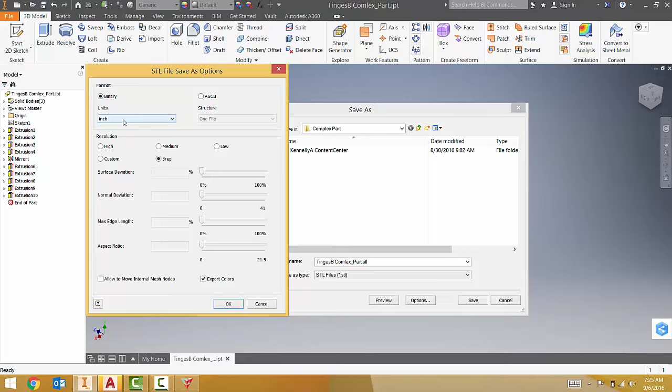First thing I have to do once I'm done modeling my part is go to the File menu and go to Export. I'm going to change the format of this file from an .ipt file to an STL file, which is actually the exact same file type used for 3D printing as well. Before you click Save, it's very important you go to Options and make sure the units here are the same as the units you used, in this case inches. Then click OK, select the location you want to save this file to, and click Save.

Once you have that, we go into a program called Autodesk 123D Make. It looks like this on your screen, and it's available currently in the HF3 lab. I'm going to import this file. And here is my file, how everything looks.

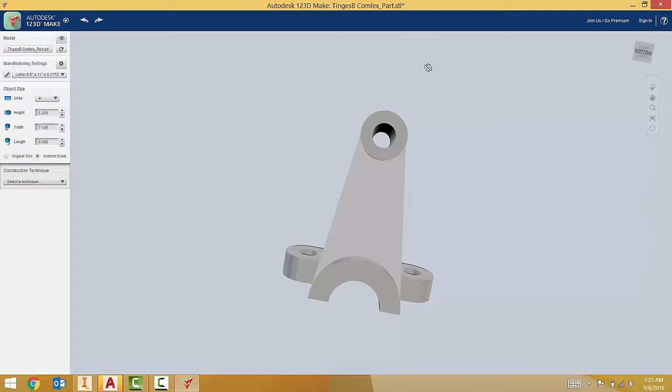Over here for manufacturing settings, this is the size of cardboard that you're actually putting into the laser cutter. So the default's at 8.5 by 11. Typically our cardboard is 0.125. Again, you'll have to measure those before you cut.

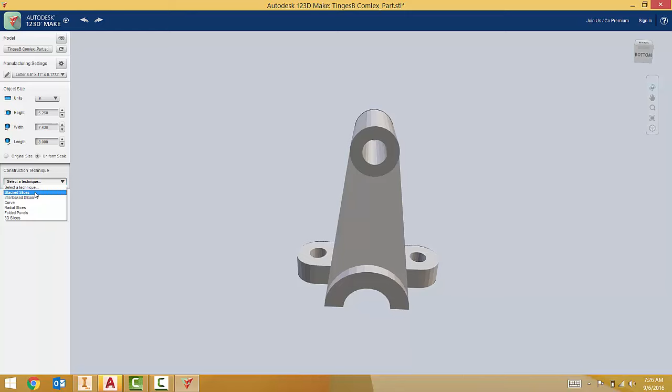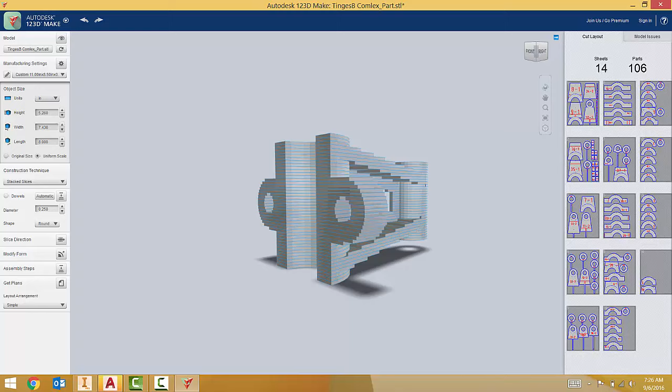Construction technique, there are a couple different options here. Stack slice is probably the most simple, and you can see there where it's actually taking this piece and cutting it into a bunch of different slices of cardboard. Currently the way we have this set up, it's actually 14 sheets of cardboard and it's in 106 parts. I can modify that right here by changing the scale, because that's a lot of parts.

So if I make sure uniform scale is selected, I'll just hit the down arrow and go down to a more appropriate size. I'll say a length of 5 inches.

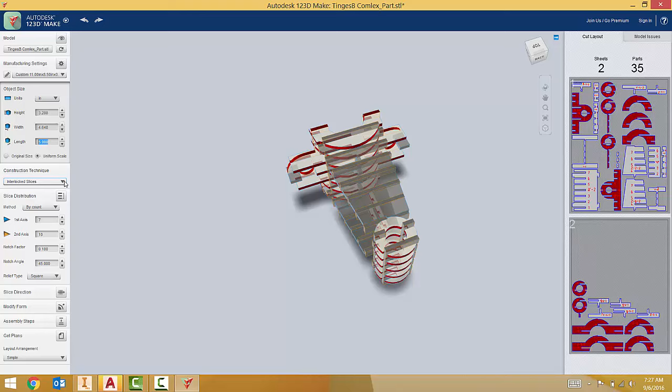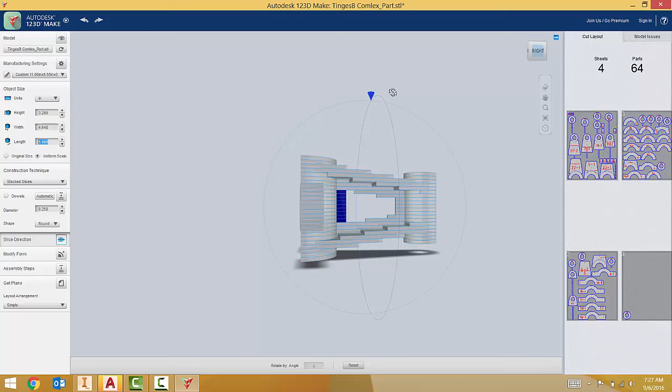There's other ways to do this as well. You can do interlocking slices, although with this part, as you can see, all these red ones, it doesn't seem to work very well. But depending on the complexity of your part, that may be something you want to look at. You can change the slice direction, where I go ahead and rotate it by grabbing this blue triangle here and rotating it around, if I can do that.

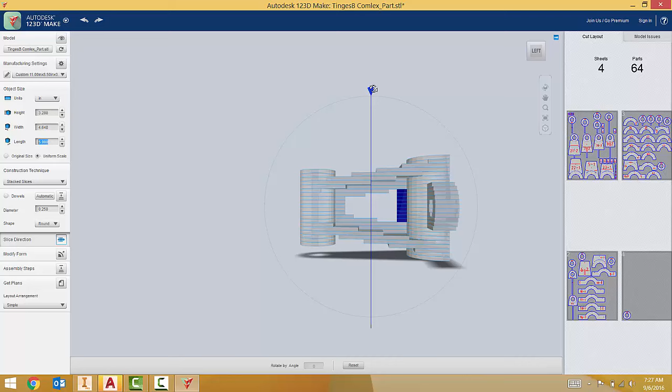Somehow this is not working for me. And then once you have it set up the way you like it, I should be able to do this, but it's not letting me.

Once you have it set up the way you like it, this is 4 sheets, 8.5 by 11 sheets, 64 total parts. You can get my assembly steps, and this is actually going to show you how to put your piece together. So it starts out with this piece right here.

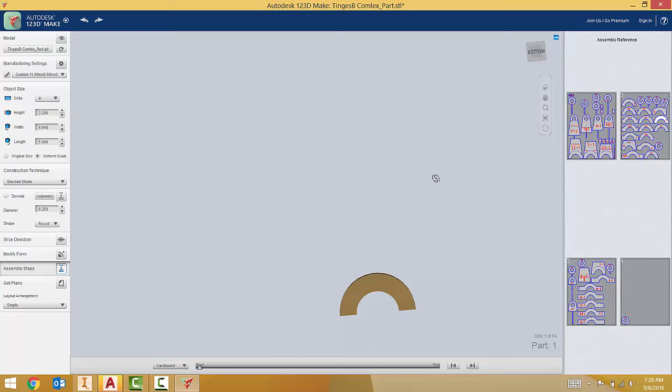My next step, and actually it will highlight over here what part that is. As you can see right here, I'm on part 4-1, so on and so forth, and it has you bring your parts in as follows until you have your completed model.

After that's all set up, you want to go to Get Plans. Your file type for your plans needs to be a DXF, inches, and go ahead and export.

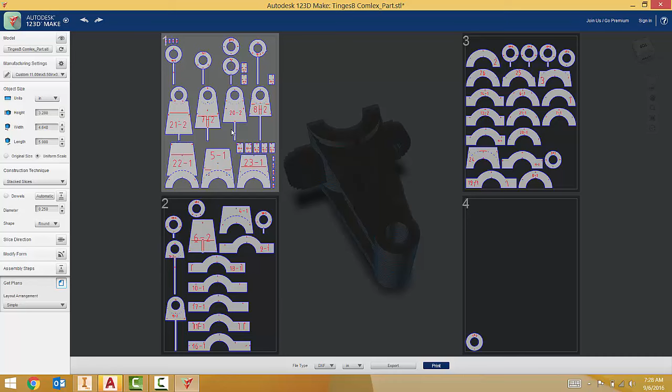Now, because I have more than 1 sheet of cardboard, in fact 4 total it looks like, it's actually going to go ahead and export to a zip file. If I don't want to do that, I simply have to make my model smaller, and if I made this about 2.5 inches, I now have it on 2 sheets, 64 parts.

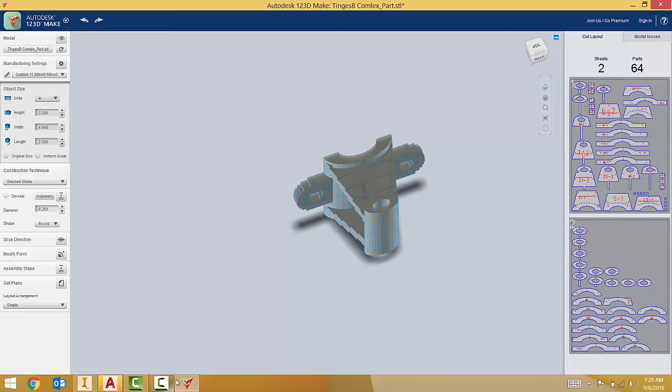It'll still make me do it as a zip file because there's more than 1 sheet of cardboard. So I'll go back down here to Get Plans, DXF, Export.

You do have to sign in and create an account. I currently already have one, but you will have to create one to use this product, which shouldn't be too bad.

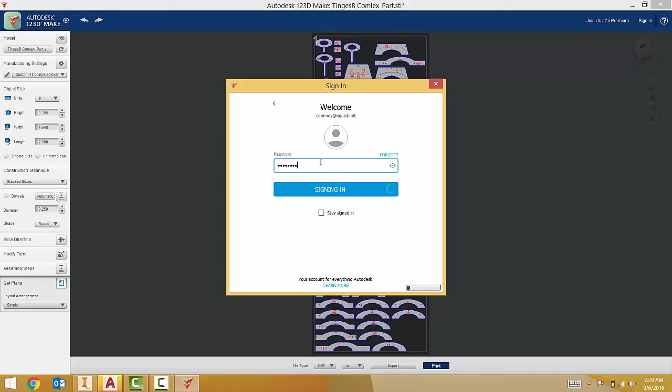And I'm going to go ahead and save this, in my case my desktop. You probably want to save it on your H drive so you can access it from any computer.

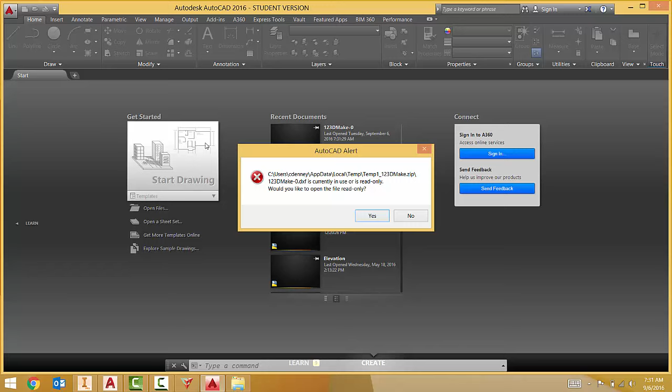After this, I'm going to go to Open Files in AutoCAD, and it's a zip file. Notice nothing shows up here because remember it's a DXF file, so I have to change it to that. Not 100% sure what's happening there, but that's fine.

Now, a couple things you have to modify in here. Red on our laser cutter means to cut, blue needs to engrave. There's probably a setting inside 123D Make to make it where when it converts it to an AutoCAD file, it already does that for you. Unfortunately, right now, I don't know how to do that.

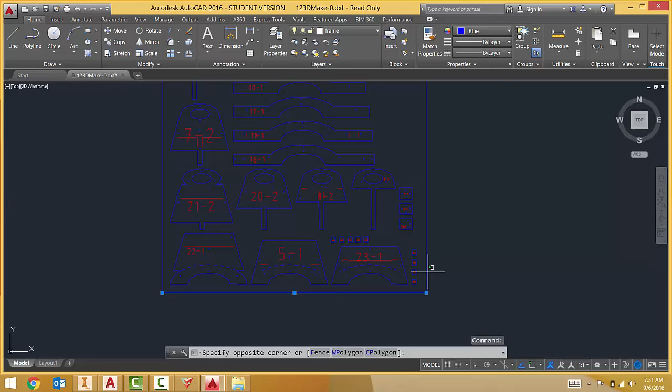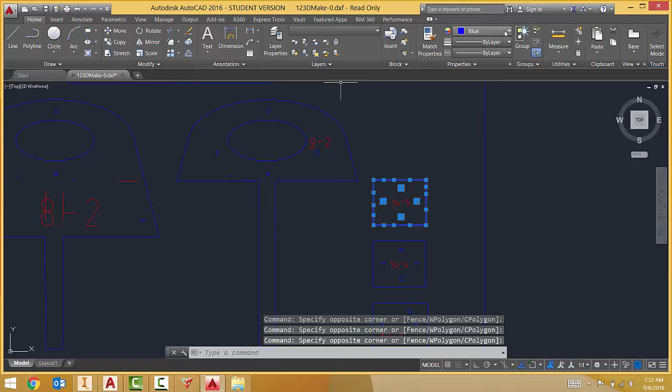So you have to literally go in to every single line here and change all the cuts to red and change all of the text to blue. I'm sorry, all the text to blue, yeah, and all the cuts to red. So I'm going to change this, I'm going to change all that to red. What was red, I want to change to blue.

Once you have this set up, it'll now cut out this piece like this and it'll engrave the number on the cardboard, which will help you correspond to these numbers here. As you start to assemble your piece, you'll know what number goes in because it highlights it over here.

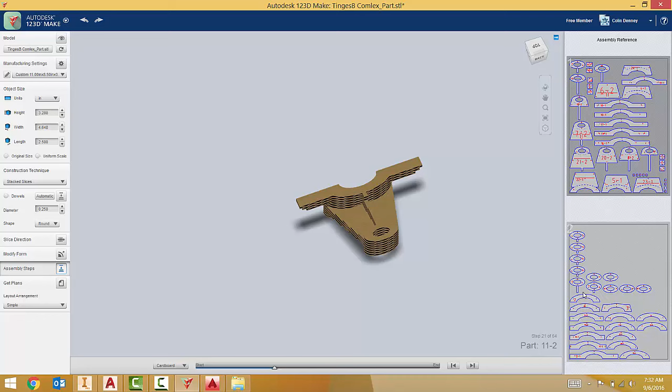After that, take it over to the laser cutter and cut your piece out. You should be good to go. Thank you very much.